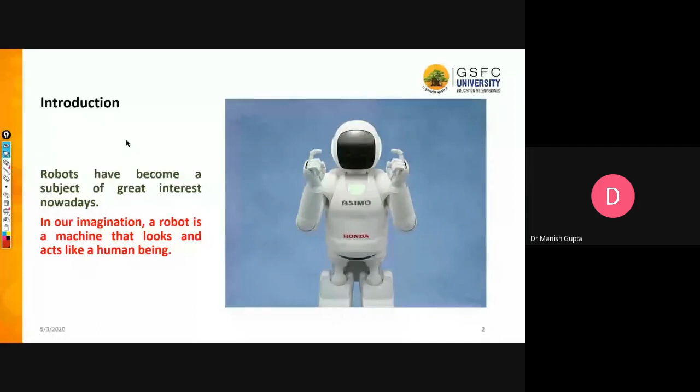So robots are basically a device, a mechanical device. The important thing is that robots are basically a device made by men, most of the time programmed — programmed in such a way that they can move by themselves.

Their motion and their movements are always modeled, always planned by some human who is programming for that. They are always sensed by some particular object for which it is planned. They are actuated - there are some inbuilt components, hardware, which are actuated on that basis. And most importantly, they all can be controlled.

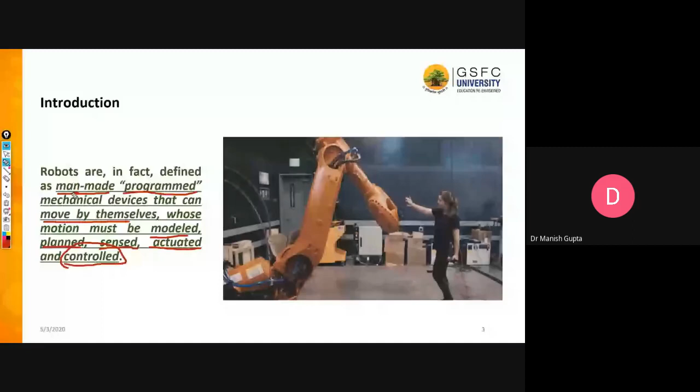If you focus on this definition, you will find two, three big concepts. The first one is all robots are ultimately some mechanical devices. The second one, they are well programmed. And the third one, they must be controlled. On the basis of these three things, the robots are made.

Now, a robot is always made for some specific type of application. In comparison to the human brain, a robot has very less power or limitations to do things. It is always programmed to perform some limited operations, while a human can think marvelously and perform n number of things at the same time. He can think of n number of things while a robot cannot. So a robot is basically a machine, a mechanical device.

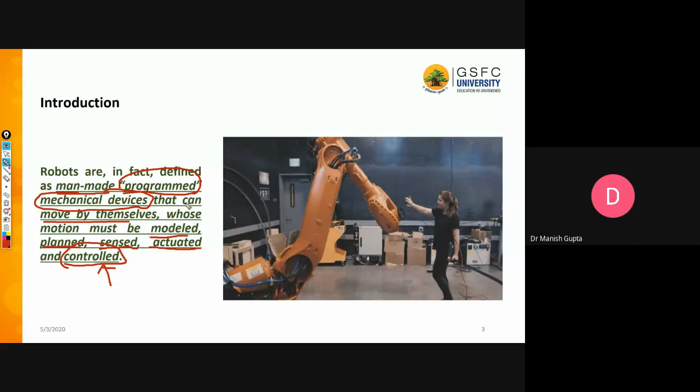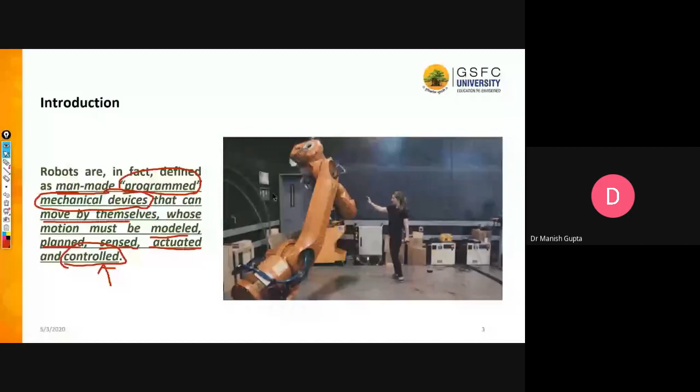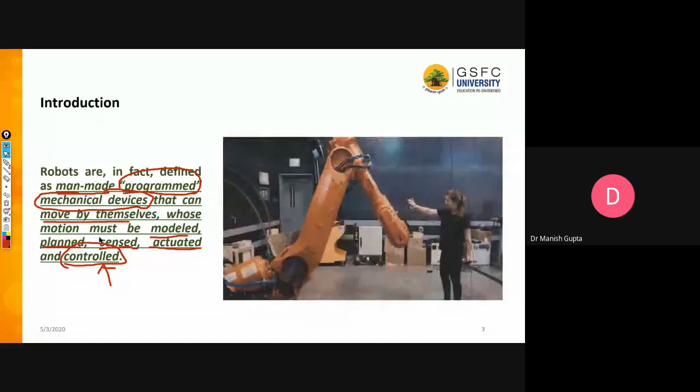If I go through this all, simply I can understand that to understand any robot, what we need to learn is to have some basic strong knowledge of the foundation of mechanics, which is what we learned in class 11th. Now we need to have some basic idea of programming - it's not too hard to learn. And the third thing is, to understand the role of sensors and actuators, we must have good knowledge of electronics too. So robotics is a mix and a great combination of mechanics and electronics along with programming.

So how it is and how it happens, we'll see that in the upcoming slides, right?

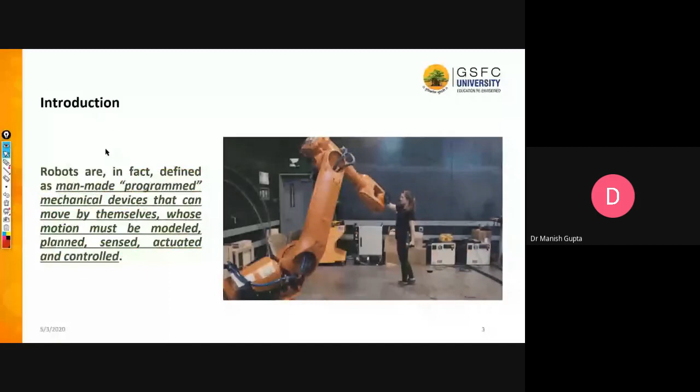So what is robotics? Robotics is basically a science which is used to design or build different types of robots, and each robot is specified for some kind of application. So ultimately, robotics means to work on that particular requirement - for which particular application we want to make our robot - then to analyze what kind of components or what kind of design we should prepare, and finally to make it. This all in combination is known as robotics.

Simply, if I simplify things, robotics can be defined as the study of robots - meaning the requirement, the application, and the working of it. The aim of robotics, that is the most important thing - the aim of robotics is to design an efficient robot, right?

So here in the animation running here, you can find one robot. This robot does not look in any way like the robot in our imagination, like we saw in the Transformer movie series and all. The robot is anything which is a mechanical device. You can see here we are using a mechanical device, and then there is some operation which is assigned to it, and it is supposed to perform that operation.

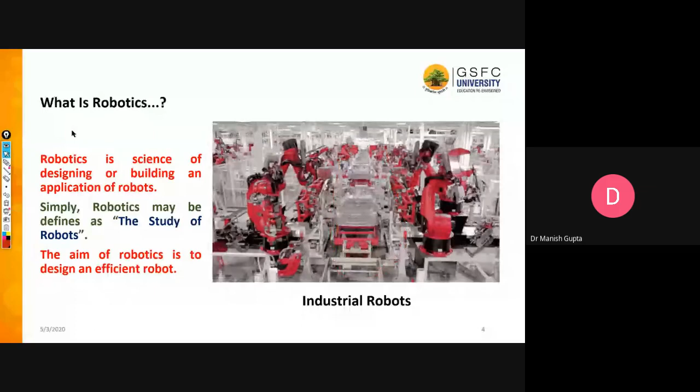So do we actually need robots? We'll see that. Now, by this definition and by the understanding we have developed till now, we can focus on certain things.

The first thing, robotics can be defined as a combination of two different parts of physics, and that's why physics faculty is teaching you robotics here. So one is mechanics and another is electronics. And again, in electronics, there are two parts - one is hardware, another is software, that means the programming. This all in combination is required to create a basic robot as well as a very advanced level robot.

So robotics requires the basic knowledge of these things. If you are looking to pursue your career, or if you are willing to be good in robotics, your fundamentals of mechanics and electronics, whatsoever you're studying in class 11 and 12, that must be quite strong. If they are not, please do it.

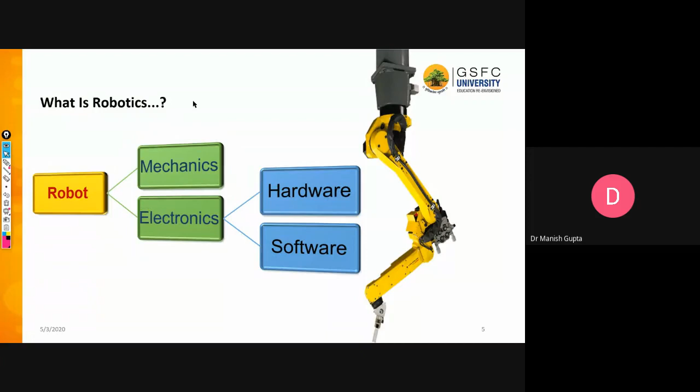Now, do we need robots? Yes, of course, we have seen a good number of robots now here and there, and they are somehow integrated in our life, knowingly or unknowingly. But do we actually need that? Yes, there are certain reasons why we need robots.

The very first reason is speed. The robot's speed is something which is unmatched with the human being. See, when we talk about human beings, we perform n number of tasks in a day. That's why we are not as perfect as a machine can be. We get tired, we need to take rest, we need salary to do something, we need to get compensated for something.

Robots do not want anything of that at all. We get bored when we do repetitive tasks, and robots are something which can do anything n number of times and without taking any rest. So whenever we need to work in some kind of hazardous or dangerous situation, human beings always have some kind of sensitivity with respect to the hazards and dangers, while robots can perform that task.

The other thing is they can do repetitive tasks, n number of times. There is no time lagging in their work. They work with accuracy, and the accuracy of robots is quite good. If the programming is done well, and if we have good quality sensors and actuators, then the robots work actually well, and their efficiency actually makes them very much useful.

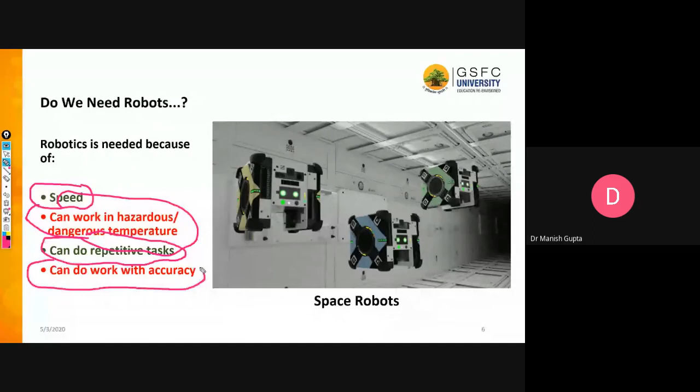So we need robots, and that's why the robotics market is taking place and growing nowadays.

You see this video which is shown here along with this slide. Just imagine that there are three persons who are supposed to hang like this in the air and perform some certain task which is given to these robots. You can imagine how boring and how tired it is going to be for them. For robots, it's an endless task — they will do it n number of times.

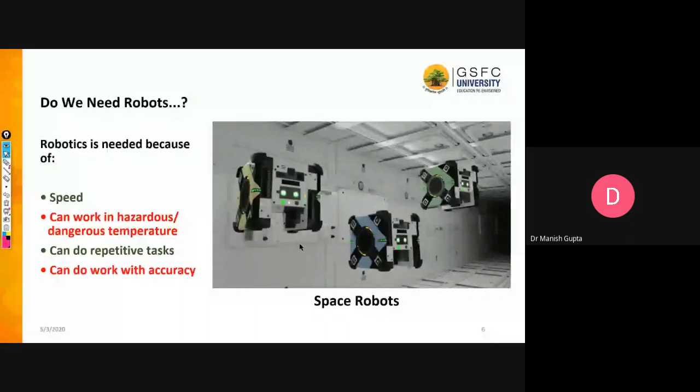Now, the history of robot. It was Karel Capek, a Czech person, who first introduced the word 'robot'. This word was actually taken from the Czech word that basically means forced labor, which is forced to do something. You can compare the robot with some kind of forced labor in history, which you see in some movies — they are forced to do the task, even if they are tired and not having any kind of energy, but they are supposed to perform that task.

The similar thing is there, and the beauty of robots is that they need only power supply, instead of salary, food, or getting tired. They don't need anything else. If they have adequate power supply and are programmed well, they will keep on performing.

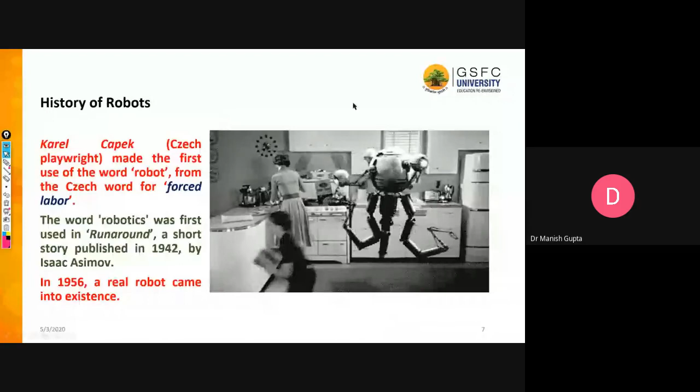The word 'robotics' was first used in Runaround, a story published in 1942, written by Asimov. In 1956 — around the time of the Second World War — the first robot came into existence. Though in Hollywood movies, robots exist even before that time.

So there are certain laws of robotics when we make a robot or work on some robot as an engineer. These laws are performed for robots and are even made learnable to robots too, and most interactive robots understand these laws in one form or another. These laws are very similar to thermodynamics laws — they came in the picture as first law introduced first, second law second, third law third, and the zeroth law introduced last.

The second law is that the robot must obey orders given by the human being, whatever command is given, it should follow, except where such orders violate or conflict with a higher order law. The third law says that the robot must protect its own existence as long as such protection does not conflict with a higher order law. And above the third order is the zeroth order law.

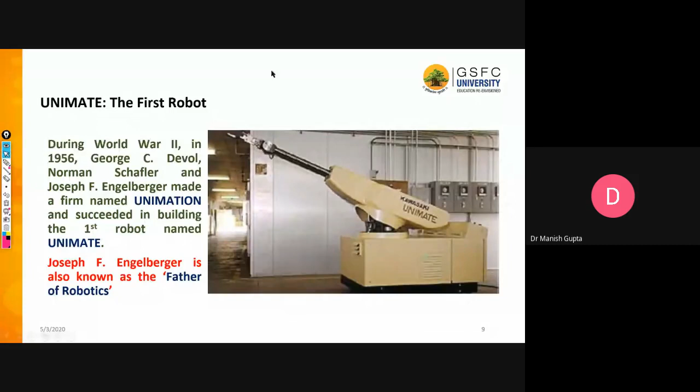Now in robotics technology, there are certain components always found as essential parts of a robot, and these components are now being defined. Most robots have at least the following parts.

The first part is the manipulator, or rover. The manipulator is known as the main body of the robot, meaning all kinds of links, joints, and other structural elements that are there in the robot all come into this part. So whatever structural elements we have in a robot, that is basically the manipulator or rover.

Then there is a second part named the end effector. This basically identifies the last component of the robot, which is supposed to be controlled by some kind of program. That last component is separately defined in robotics. The part that is connected to the last joint or hand is known as the end effector.

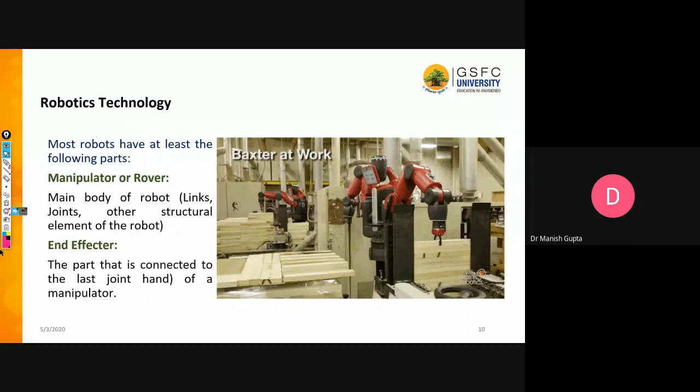If we move further, there are more components. There are actuators in a robot. Actuators mean that whenever we have some kind of input, on the basis of that input, the program we have made allows the robot to execute something, to do something, and that execution or doing of work is done by actuators.

Like there might be some kind of motor, or some hand of a robot moving from here to there for a purpose of work. So all these components which act on the basis of some actual signals are known as actuators.

Now we need another component which can sense these kinds of inputs. Let's say we have a robot that should respond to rising temperature. There must be some kind of sensor which senses that temperature first and informs the program, the basic computer inside the robot, that the temperature is changing, and that's why the actuator should get active.

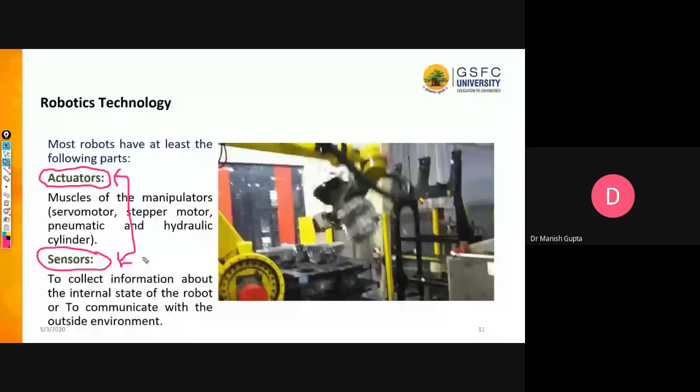So that part is done by the sensors. These two, actuators and sensors, are basically electronic components and are very important in robotics. While studying robotics, we must have good sound knowledge of actuators as well as sensors.

So here we have a robot. You will see there is one arm of that robot which is moving and detecting something. On the basis of that detection, a sensor has detected this particular part, and actuators become active and perform their task, the task which is programmed inside this robot.

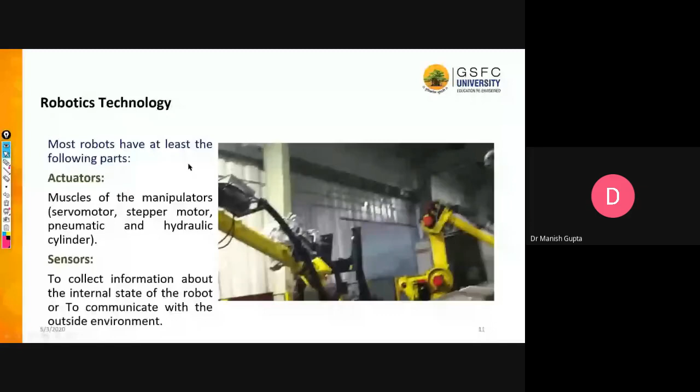Now there are two more things in every robot. One is the controller. The controller is basically a small processor, like the CPU of our computer. That controller actually does all the tasks. Whatever programming we make gets stored in that particular controller.

Then we have a processor. That processor is the brain of the robot, which calculates all kinds of motion - like the ALU of our CPU. It calculates the velocity of the robot joints and the movement of the arms, and everything is done in the processor, and accordingly commands are given to the actuators.

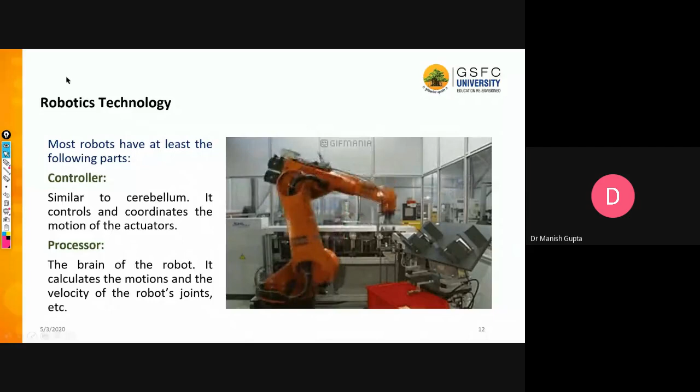Now, another important part of the robot is the software. The software is basically the operating system. On the basis of that, we develop our code, and when we change the operating system, the language and the programming code get changed.

So we need to learn the adequate software which is useful for our robotics programming. Normally, for the basic robots, Arduino programming is being used. Arduino is very similar to C language, and C language is the base. If we know C, then obviously we can work on any language whatsoever is given to us with some small efforts to understand it. The failure of software may lead to various number of problems.

And see here, we have one animation again in this diagram. If you will see it, then you will find that even with good programming in robotics, if it does not meet...

considering all the constraints and the environment variables, then sometimes it leads to failure. You will find here that the robot here is a scene of RoboSoccer, the RoboSoccer League. So the robot is supposed to kick the ball at this time, and because some environment variables are not taken care of in the programming of this particular robot, it's not able to do it. So that's all about the components which are there in the robotics technology and which are used,

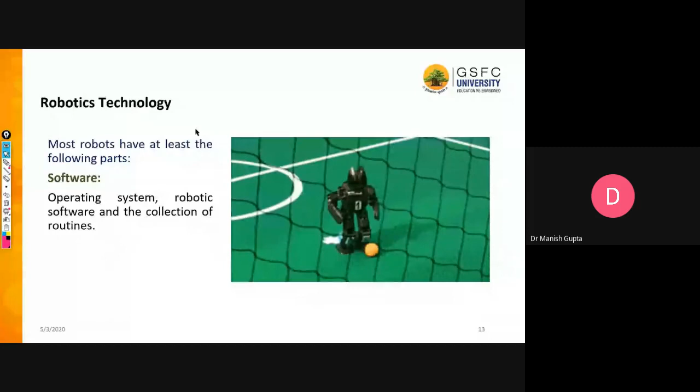which are required to understand or design a good quality robot. So let's move further, to the robotic structure design. When we design any robot or any structure of a robot, there are certain things which should come to our mind first, and then we should look for the design. We should start with some kind of questions with ourselves.

And the questions are very obvious ones. The first question is utility. We must know what kind of utility is going to be there for the design which we are making, because ultimately a robot is supposed to perform some certain work with a number of efficiency. If it is not able to do so, then the creation of the robot is not worth it at all.

Then there must be some kind of creativity. Creativity may be in terms of new functionality, it may be in terms of new speed, or it must be in terms of new durability and so on. So there must be some kind of creativity when we design a robot. For initial or learning purposes, we always study and design whatever already exists. But ultimately, as robotics engineers, when we grow, we try to design something which is till now not available, or at least not available with efficiency.

If you'll see, then you'll find in recent news that in the current situation of COVID-19, there are robots which are doing good work in many countries. There are robots which are helping police. There are robots which are helping in the medical sector and so on. And they are actually working in those critical areas where we cannot afford to cost the life of a human being.

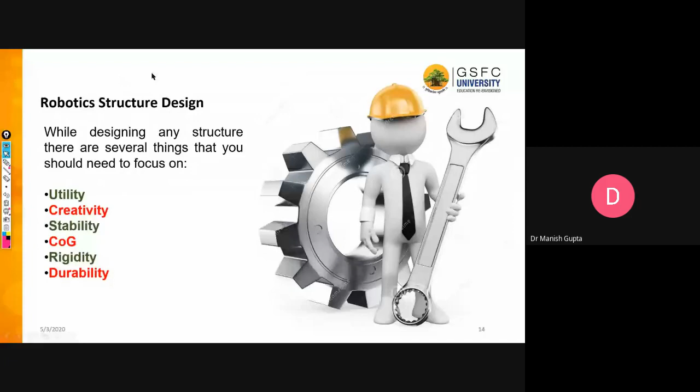So these are basic robotic structures. Now let's focus on the types of robots.

There are a variety of robots available, and broadly they are categorized in four. I have included five here. They are broadly categorized as...

Mobile robots - and the beauty of these names is that by name itself you will understand quite a lot. The mobile robot is something which is movable, which can move from one place to another place completely. The industrial robot is something which is used in industry. We'll see in detail.

The autonomous robot is something which does work by itself without any further command. Once it is programmed, it will work itself. The remote control robot is something which can be controlled from remote areas, by its programmer. And the virtual robots are something which actually do not exist. We will see what it does.

So there are certain categories of robots, and by going through this category, you will come to know that robotics is quite a vast area. There are very good numbers of possibilities of career in robotics, and you can learn a lot during your graduation, depending a lot on from where you are pursuing your graduation, because these kinds of exposures are not available everywhere. So let's move.

So the mobile robots - there are two kinds of mobile robots in broad definition. One is rolling robot. Mobility from one point to another point of a complete system can be done in two different ways. One is rolling, and another one is walking.

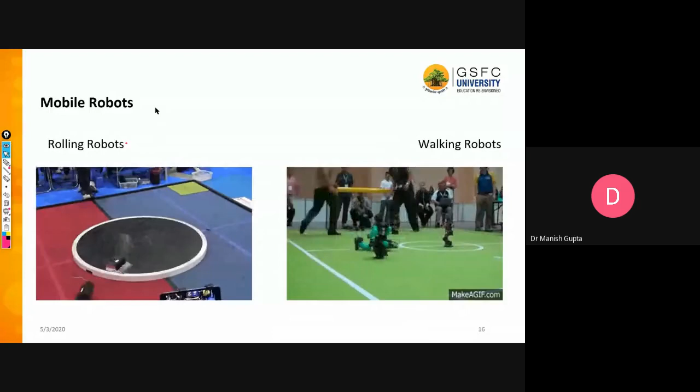Now understand this thing - we have broadly categorized the robots in these categories. It doesn't mean that one robot always belongs to one category only. It might be possible a robot is mobile robot and also autonomous. There might be a robot which is industrial and autonomous, and any other combination. There might be that possibility, right?

So it's not always like that, that a robot which is available with us belongs exclusively to one category which is defined here. It can be a combination of more than one.

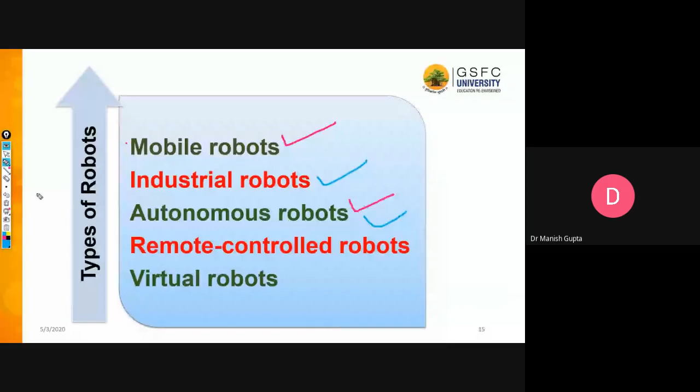So let's move to the next - the industrial robots. Industrial robots are something which are always stable. They stay at one point. They are also known as stationary robots. They don't move from their own points while staying in their own position.

They have some kind of robotic arms, and only these arms move, and the movement of those arms is designed such that they perform the desired operation. Most industries use these kinds of robots, and these kinds of lines which we are showing in this presentation are known as assembly lines - automated assembly lines.

Now you can understand that the center of gravity is quite important. Otherwise, if there is a robot which is not designed well with respect to its center of gravity, then the movement of an individual arm or more than one arm, instead of complete body movement, might be quite difficult. So taking care of COG, center of gravity, becomes quite important in robotics, right?

So these kind of industrial robots, they always perform most of the time repetitive tasks. They repeat their task again and again. Whatsoever we have seen in this video, they will keep on doing the same things again and again without any tiredness, without any kind of complaint. They will do it day and night, 24 into 7.

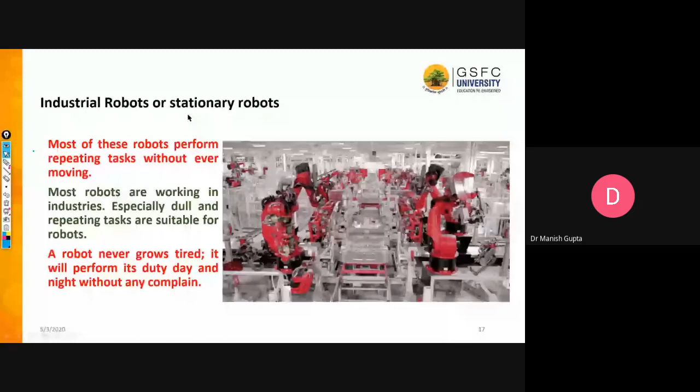Autonomous robot, by name, it makes something clear that their programming and their sensors and actuators are made so beautifully that depending upon the situation, whatsoever the outer environment is and what they are supposed to do, they themselves decide what should be the next step.

Imagine that ISRO or NASA is planning to send some rover to Mars. So it cannot be always all the time controlled at Mars from the Earth. So it must have some kind of inbuilt programming or inbuilt capacity to take decision on some particular point whenever it gets stuck. So that's the beauty of robotics.

If that program is good enough, then the design is good enough, right? Now, these robot missions, means the Mars rover or any other rover which are sent to other planets, are basically designed for some particular task, to collect particular kind of samples or to make particular kind of observations. For that purpose only they are programmed, so that if there are some ifs and buts in the surrounding, if there are some kind of situations in the nearby environment, they know how they should react, how they should work in that situation. So these kind of robots are known as autonomous robots.

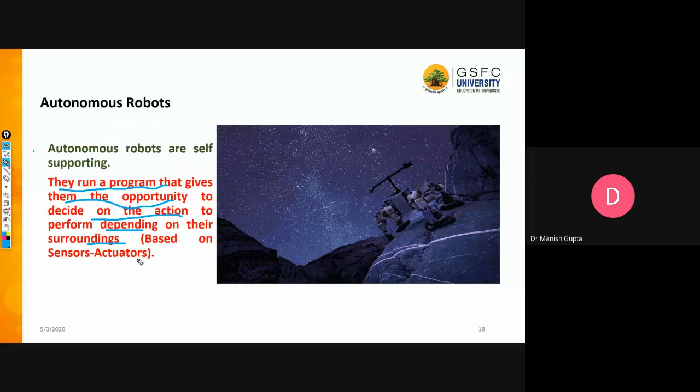They get continuous inputs from their sensors. On the basis of that, their processor and controller provide the instructions to their actuators: okay, this is the situation and this is how you should act now, right? So this is the third category.

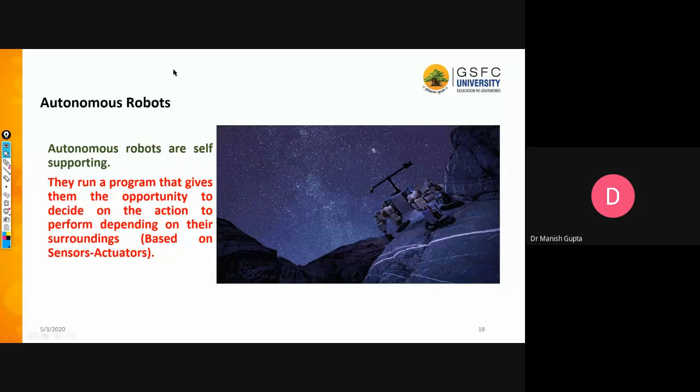So autonomous robots nowadays are self-learning also. They are actually something which learns from their mistakes. So they have certain kind of sample behaviors inside them. They used to adopt one behavior by one, and find out in which one their performance was better. They self-analyze it, and on the basis of that, they repeat their most successful routine, whatsoever there was.

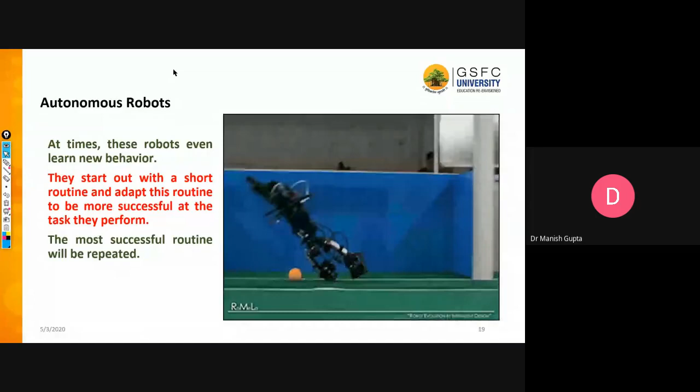So what happens actually, a robot is trained in this way. So out of the sequence which are done n number of times inside a robot, in their trial session, it observes, it calculates, and it absorbs the best ones.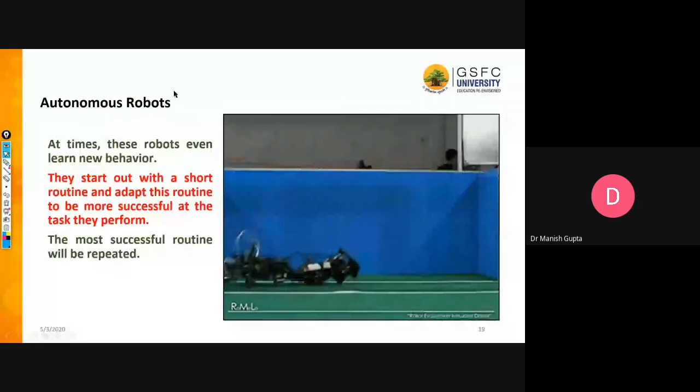So the remote control robots - next category of robots is the remote control. Most of the humanoids are made in this category only. And these are the robots which are made for that purpose where there are some dangerous situations and humans cannot go there. So robots are there.

There are some cameras and some kind of sensors and actuators inside it. They see what's happening in the surrounding, and then the remote controlling person, who is the controller actually, gets all kind of input based on that. The control room person decides what should be done in this particular situation, and that particular information is shared with the robot from the remote, and instructions are given from the remote. On the basis of the instructions, it acts again.

Right, so recently we had our tech fest here, so we called Mitra here. Mitra was one of the remote control robots. It's a totally indigenous robot, right?

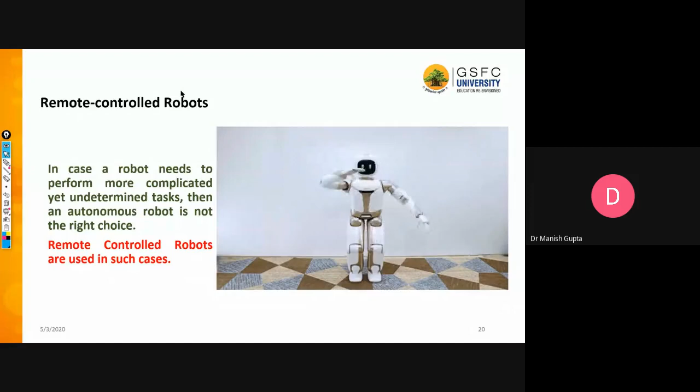Right, the last one is the virtual robot. What does a virtual robot mean? Virtual robots do not exist at all. They are just software platforms used to build robots and their blocks, used to show some kind of interactive structure of that robot. If you use these kinds of blocks and programs, then you can see how your robot should look like and will look like. These kinds of environments are known as virtual robots.

So virtual robots are used as a simulator, which can actually simulate the real existing robot and perform repeating tasks. Like we have smart vehicles that we send to service stations for repair and servicing, similarly robots can be serviced by virtual robots. So this is the last category of robots which we discussed.

So we have certain categories of robots, and it's a vast area. Most of the time, what we know are mobile robots - line followers, obstacle detectors and so on, these are basically mobile robots only. But industrial robots as well as mobile robots and autonomous robots - a mobile robot made autonomous - they all have a great future because the world requires them, right?

Drone is a robotics technology only, so you all know how useful drones are, how much they are insisted upon by governments nowadays. So now let's focus on some applications of robotics.

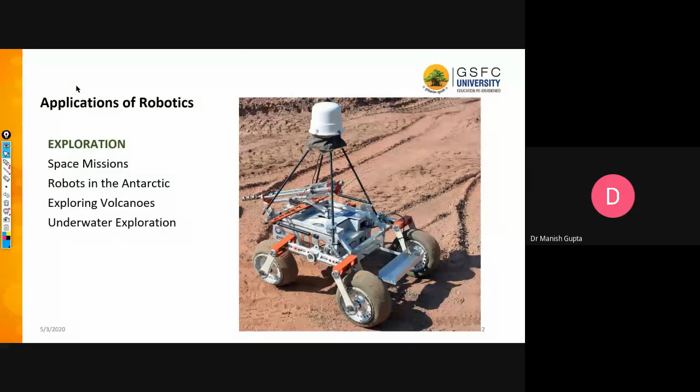In medical science, there are numerous uses of robots. You must have heard about it in newspapers and news channels. There are robots working even for surgeries. They are trained for surgeries, and their operations are so perfect that they do not make any kind of error. They are doing better than humans.

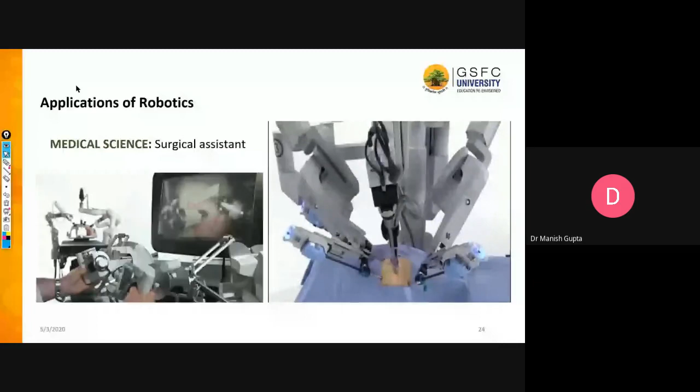They can be guided remotely by experts, and an expert can actually be utilized at many places at the same time. So in surgical assistance, robots are being very much useful, and medical science has actually become medical robotics. They are using it in a great way. There are other examples of robots working for surgical parts, and they are doing good. So similarly, when we need to deal with critical things, robotic surgery is always treated as a better option if it is available.

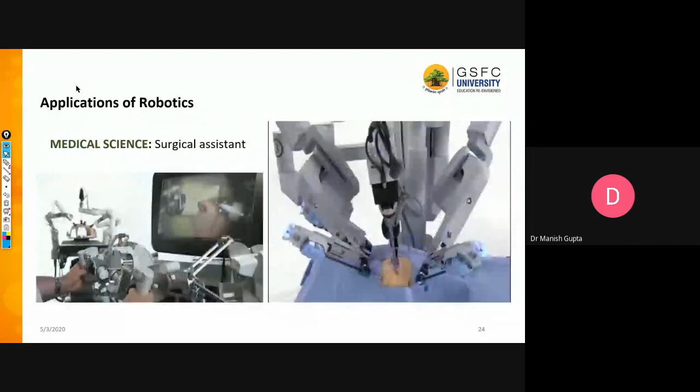There are assembly applications in mechanical factories, in handling and painting, surveillance, security, and other things. There are some devices made for home help, and robots are very much useful in that. We have already seen factories, so robots have lots of applications - you can decide your own application. Nowadays there are also IoT enabled robots which are remote controlled, so you can find a good number of things.

Now we need to understand one good thing. Let's say we have a washing machine. It has some software inside it, and we have a mobile phone, and we are controlling this on the basis of IoT. That doesn't make a washing machine a robot, right? Because of the basic definition of a robot - if we go with that, a robot must be a mechanical device which must be movable and which must be controlled by some external things. So robotics is something different from normal mechanical things. It's a part of that for sure, but not completely that.

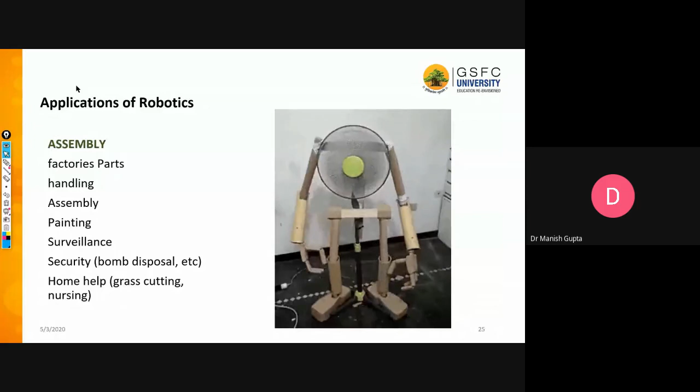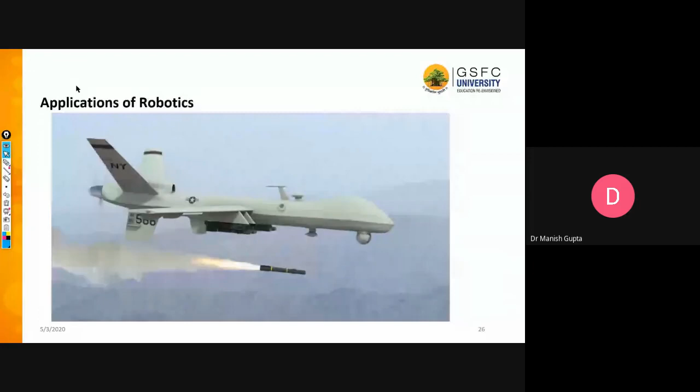Well, guided missiles, when they are launched from planes, the fighter planes and all, robotics plays a role in that. So in the defense sector, robotics is quite important. They are working in guided missiles, working in surveillance at border areas, and in different kinds of weapons which are being made. So they are made artificially intelligent by the virtue of applications of robotics.

So what are the advantages of robotics? What is the basic benefit, why do we go for robotics? We can go as far as we have our limits, and we can use robots there. We can go as deep as we want inside the water, and we can go for the mines and everything. These are the critical places where humans cannot go or cannot survive for long.

So it gives us certain information by sensors and actuators which humans cannot gather from there. It works 24 into 7 without any salary or food, and plus they don't get bored. They can perform their task because they are designated for some particular task, faster than humans, and with much more consistency, efficiency, and accuracy.

Most of them are automatic, so they can go around by themselves without any human interface or interference. So the robots are somehow an intelligent device, and on top of that, they follow laws of robotics. That means they cannot harm humanity, they cannot harm a human being.

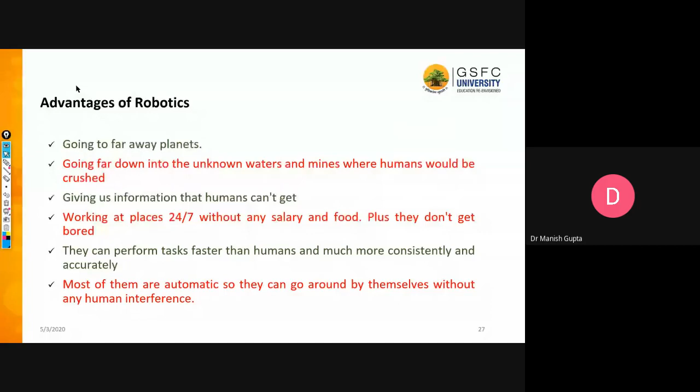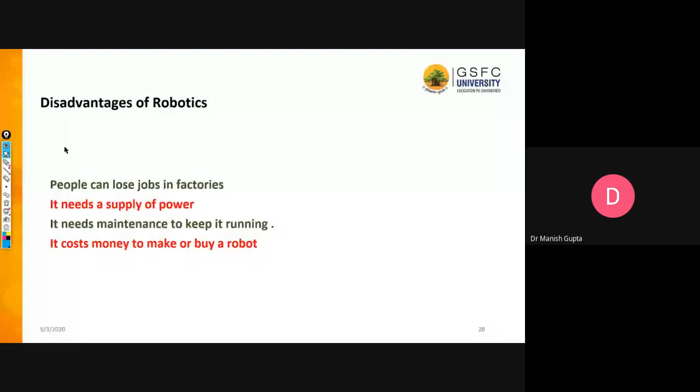Let us move next to where we see the future of robotics. Robotics will definitely get a new edge and will be utilized further. Recently, the future has already come. There is RoboCup, RoboCup soccer, which is already being played. It is a tough task to understand, to recognize its own teammates, and to make a goal.

You have seen some videos certainly, and you have probably seen that robots get fouled when they try to make a goal and track the ball, and this is a difficult task for a robot to do. So it has become a great challenge, and people are working on that. If a robot can play any good live game with other robots or with humankind, then we will have the next level of robots. So people are working very hard on it.

These constant advances are being made in robotics, and robots are bound to revolutionize humanity. They will work for humanity as they are supposed to, and even in the coming 10 to 20 years, it is going to be a great future in robotics if someone pursues it.

So this is what we discussed today about the basics and the basic concept of robotics, how robots are, what a robot is, what we mean by robotics, and what we can look for, what we should understand with this.

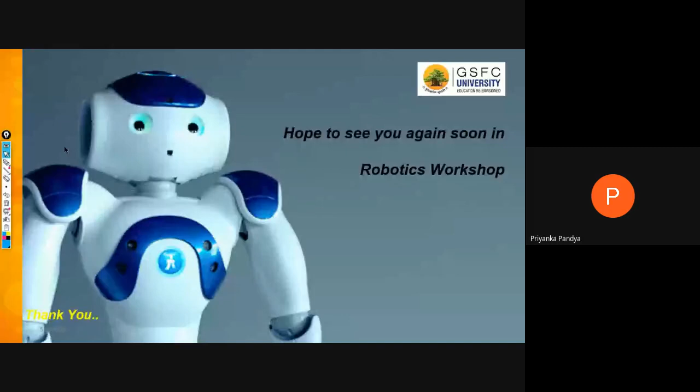So there's a question from Mr. Vikrant related to software. Which software can be used for preparation of a robot?

Actually, there are many platforms available. When you're starting with robotics, always go with Arduino. Arduino Uno is the best kit, and the software is freeware, so you can download it from the net. Simply type Arduino.cc as the website. This software is free of cost, and there are some inbuilt examples in it. If you go through that, you will learn a lot about what robotics is.

Is robotics related to software robot or physical? It's related to both, dear. We have already discussed it. A robot has, in electronics component, two parts: one is hardware, one is software. It means both. So robotics means a complete pack. Whatever robot we design for a small application, it doesn't matter, but it must be a complete pack for that application.

Suppose I want to develop a robot, then which software language can I use? You can go for embedded C, you can go for Arduino. There are n number of platforms which you can work with. Arduino is the easiest one, that's what I'm suggesting.